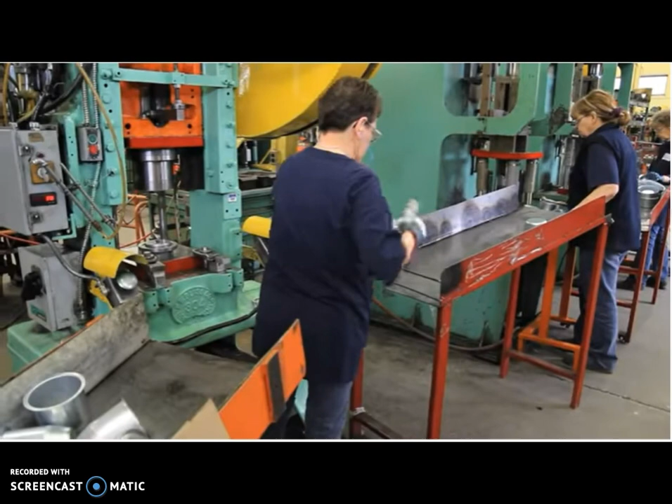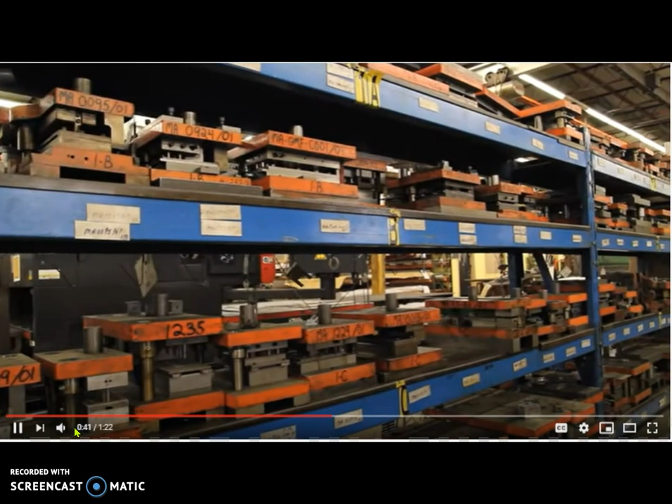Donc ici, c'est un poinçon et matrice progressif. La pièce est ici, la dernière découpe la pièce, mais à chacune des étapes, on perce un trou, on découpe une partie de la pièce, on la forme ici, elle est pliée, elle est embossée à ce niveau-là, puis finalement, elle sort.

Donc ça nous donne une idée du matriçage. Là, on a eu dans la vidéo un emboutissage profond, puis on a eu aussi dans la vidéo un poinçon et matrice progressif.

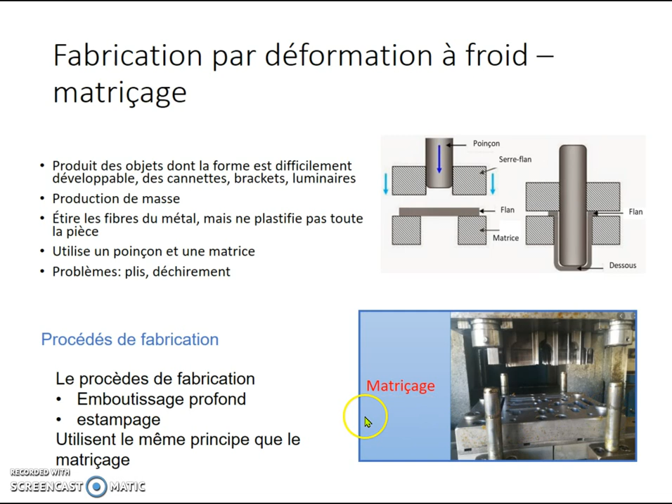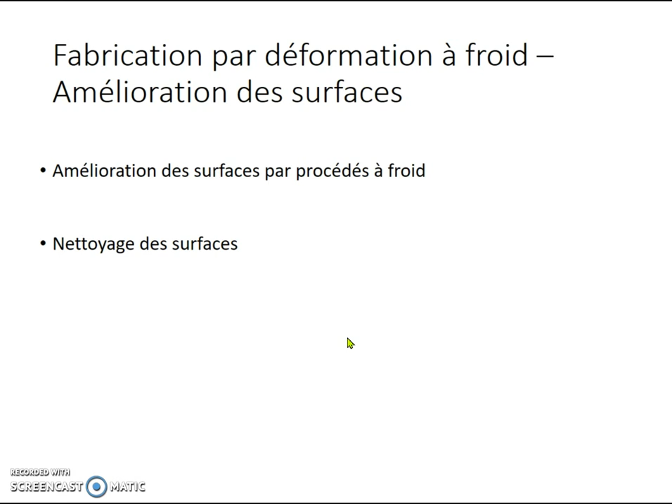Maintenant, on va traiter l'amélioration des surfaces pour à froid. Encore, c'est des procédés de nettoyage ou des procédés d'amélioration. Le premier procédé qu'on va regarder, c'est le martelage ou le shot peening.

Ce procédé-là, on envoie des billes sur la surface qui va créer une micro-compression de cette surface-là. On va regarder un peu comment que ça fonctionne.

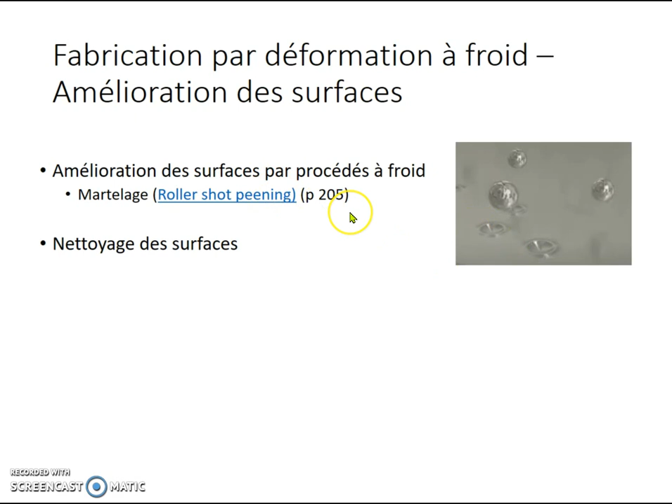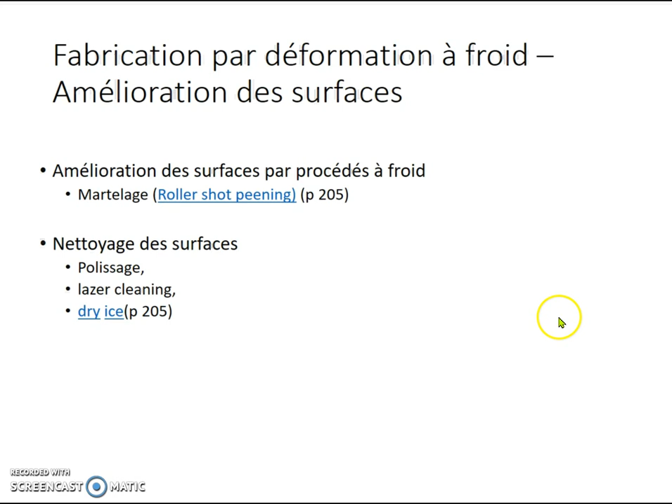Ensuite, on va regarder le polissage. Pour le nettoyage des surfaces, donc on peut polir les pièces. On peut aussi utiliser du laser pour nettoyer la surface. Et encore, on peut utiliser de la glace sèche pour un peu comme un sandblast, mais avec la glace sèche. Alors, regardons le premier, le roller shot peening.

Comment que ça fonctionne. On va regarder une petite vidéo qui traite de ça.

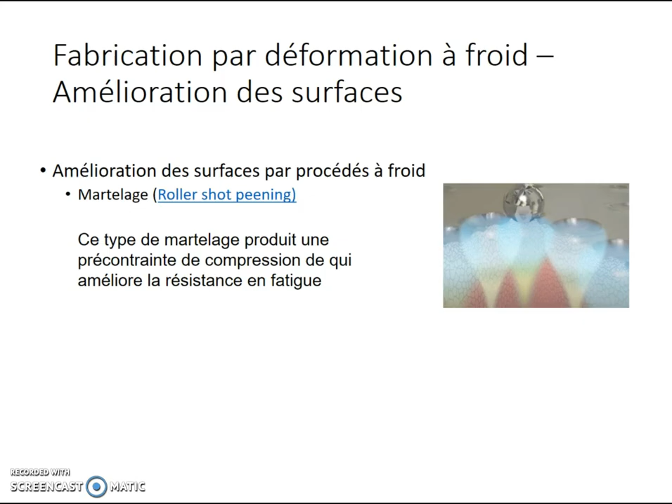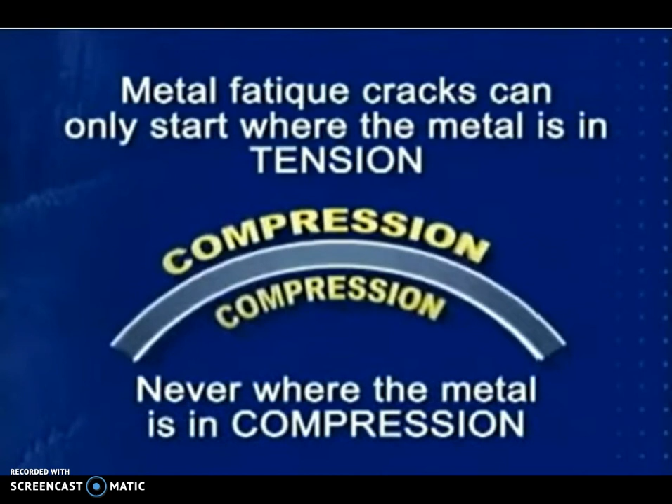When a metal bar is flexed a sufficient number of times, it will eventually start to crack in metal fatigue at the side where the metal is being stretched in tension. However, a crack will not occur on the opposite side, which is being pushed together in compression. So if we could somehow induce a compressive stress on both sides, the metal bar could theoretically be flexed much longer without cracks occurring on either side. The shot peening process, which impacts the surface with millions of tiny metallic or ceramic spheres, is a practical and cost-effective method to introduce a residual compressive stress on and beneath the surface. If a flexing load is applied to a shot-peened metal bar, the load must overcome the compressive stress from the shot peening process before a crack can start. This can translate to a significant increase in the service life of the part. To re-emphasize, metal fatigue cracks can only start when a metal surface is in tension, never where the surface is under compression. Metal Improvement Company has been a pioneer in...

Donc, on comprend un peu comment fonctionne le martelage. General Electric à Bromont qui fabrique des aubes d'ailes, des aubes de moteurs d'avion. Chacune des aubes a été martelée avant d'être montée dans un moteur, comme ça augmente la résistance à la fatigue de cette aube-là.

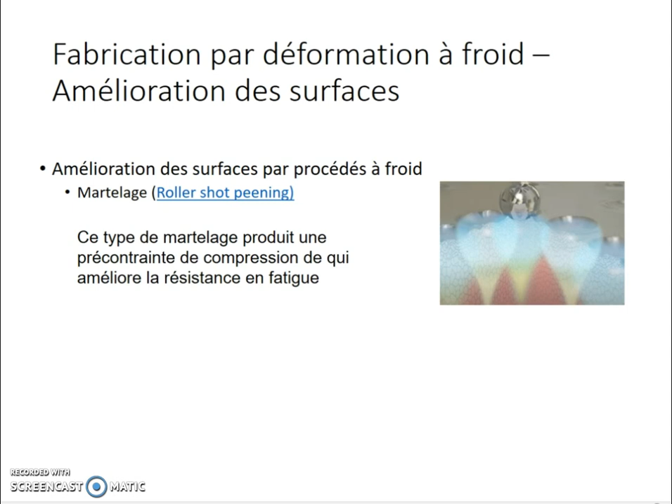Ok, maintenant on va regarder les procédés de polissage. Les petites vidéos, il n'y a pas grand-chose à dire sur ça, mais regardons un peu les vidéos pour chacune de ceux-là.

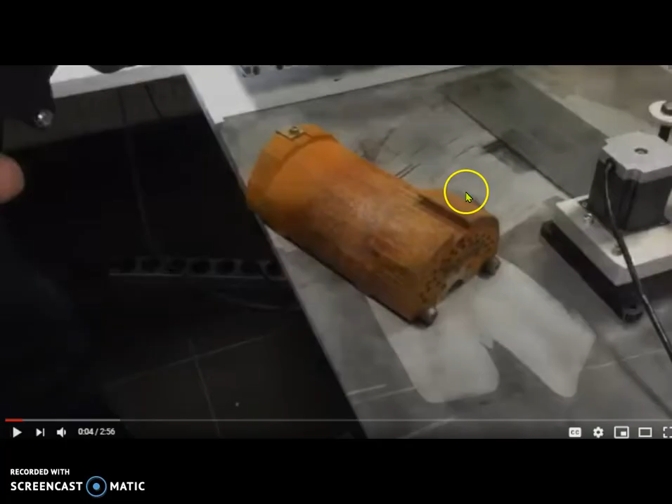Vous voyez le nettoyage au laser, qu'est-ce que ça produit? C'est quand même assez efficace, hein? Et surprenant.

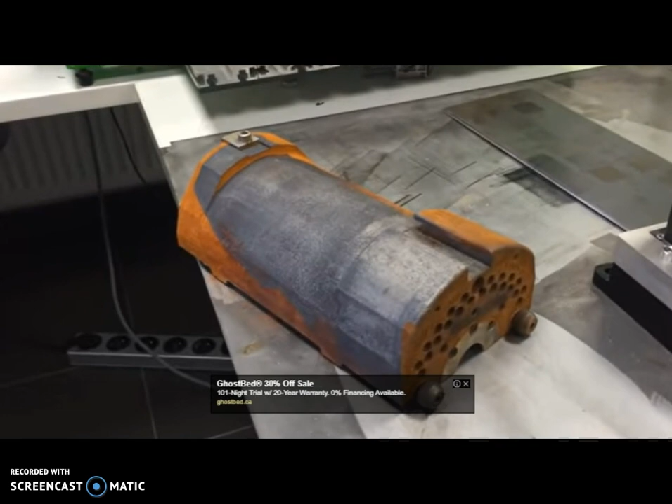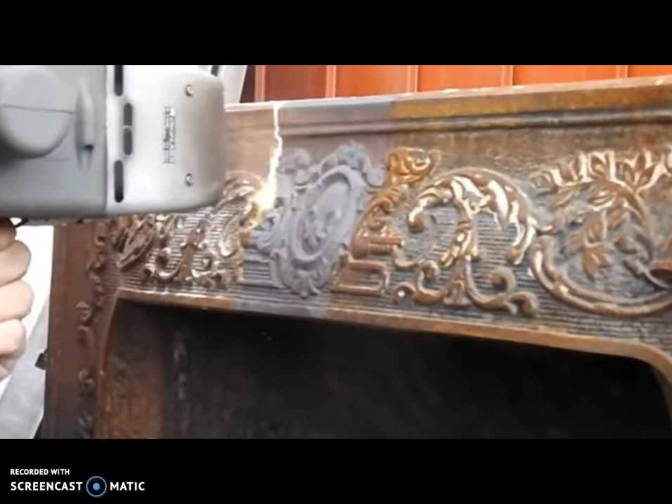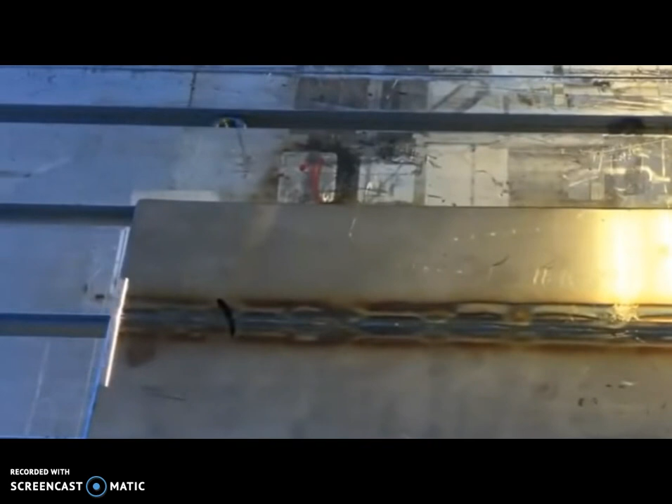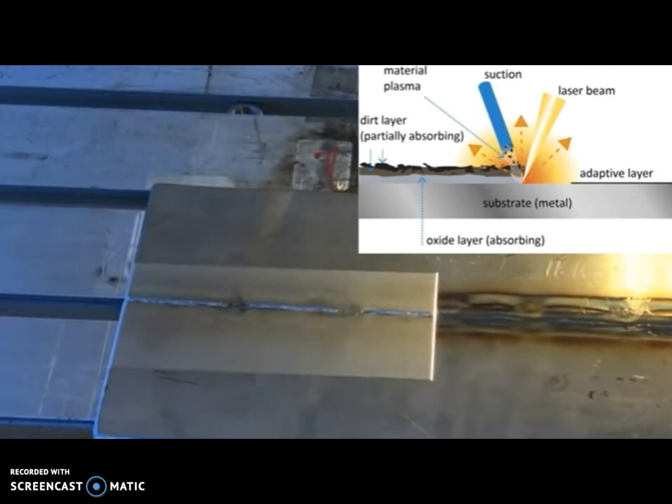I could not believe what I was seeing when I first came across this device on YouTube. A laser that cleanly removes rust and other surface contaminants without eating away the metal underneath. When aimed at a metal surface, the dirt layer and any oxides underneath will absorb the energy and evaporate. The metal underneath will not absorb the laser energy, leaving nothing but a clean surface ready for welding and painting. So how does it work? Well, the system uses short pulses of laser light at 1,000 watts, producing microplasma bursts along with thermal pressure and shock waves to sublimate the rust and separate it from the metal without damaging the piece.

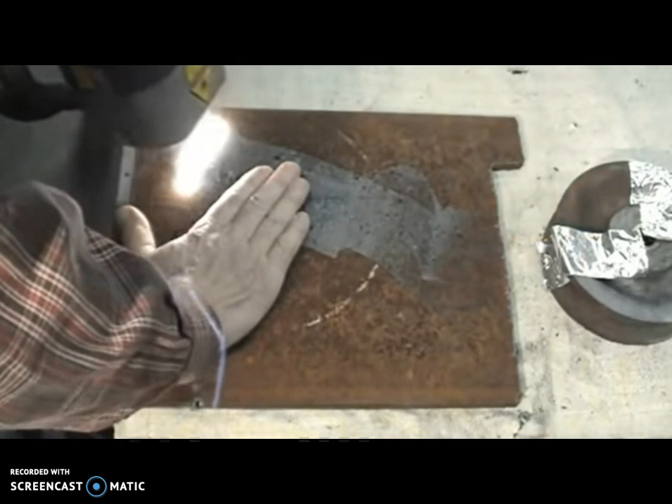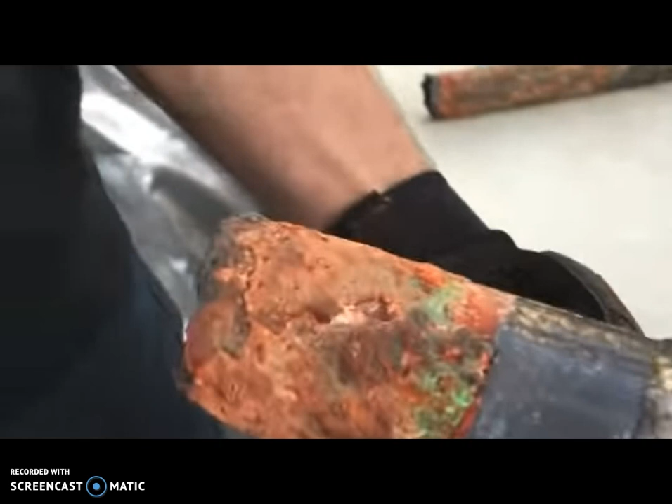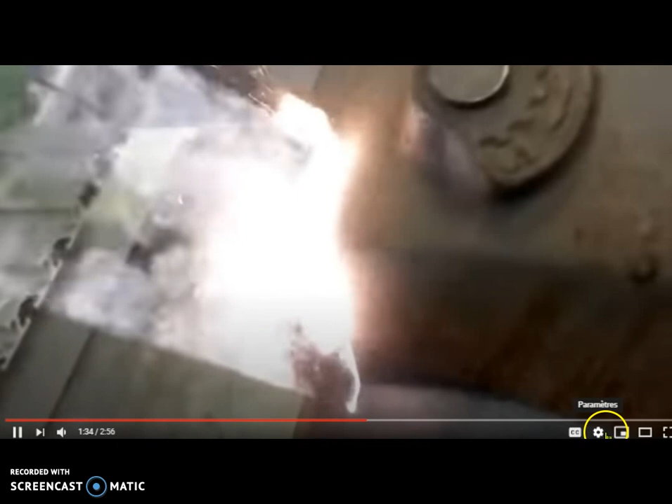Now, I know what you're thinking, as I wondered it myself, and the answer is no. This will not vaporize human flesh. Amazingly, aiming the laser at your finger doesn't even hurt at all. Material removal is halted when the laser is applied to a clean surface because it only sublimates rust. Sublimation is the act of changing the state of matter to a gas form, skipping the liquid phase. The device can be set for a certain depth to skim away surface rust, paint and filler, leaving a prepared surface for work. What would have normally taken someone hours to clean and prepare for welding or painting is now done in no time at all.

What makes this laser device even better is the fact that it has an onboard hoover system that immediately sucks up the vaporized rust, making the entire rust removal process clean and simple. Unfortunately, there is a rather large drawback: the cost. This state-of-the-art device is not sitting on some retail shelf somewhere for $100. The cheapest version on the market is a much smaller, less powerful 20-watt unit that starts at around $80,000, and the 1,000-watt unit will set you back nearly $500,000.

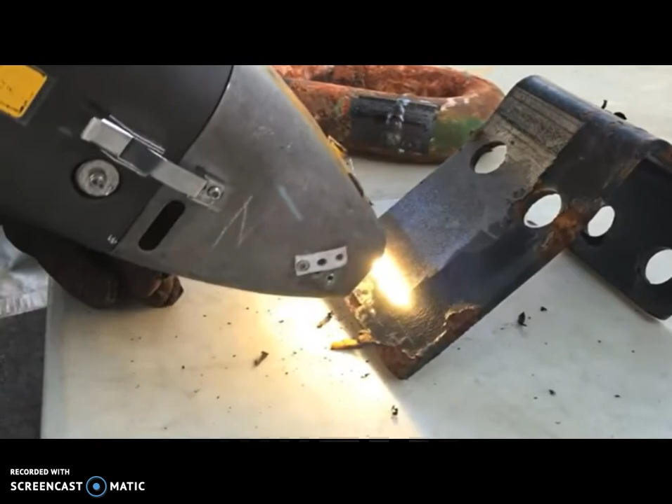Donc le laser, le nettoyage au laser. On va regarder maintenant le nettoyage à la glace sèche. Le polissage, je vais revenir, mon lien ne semble pas fonctionner.

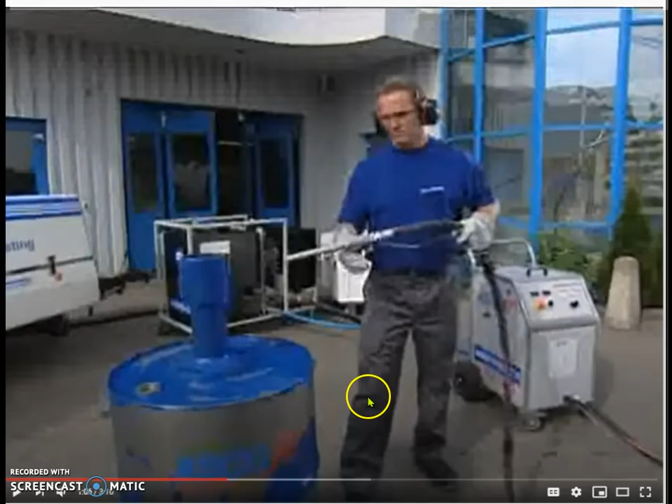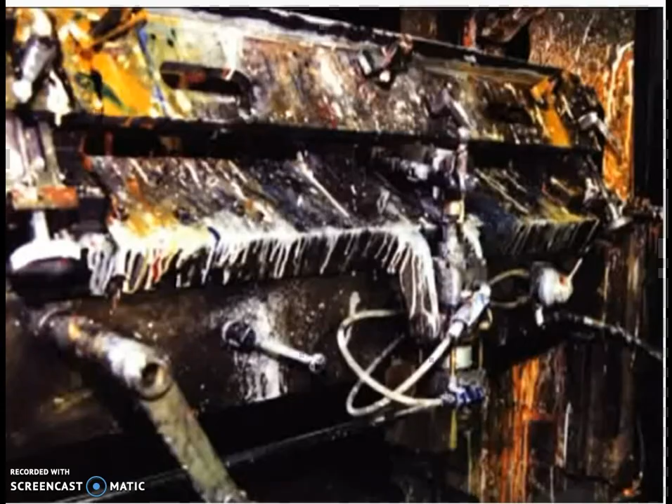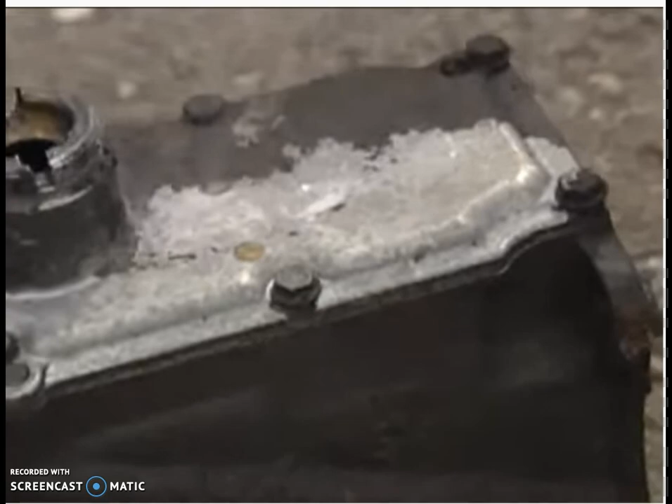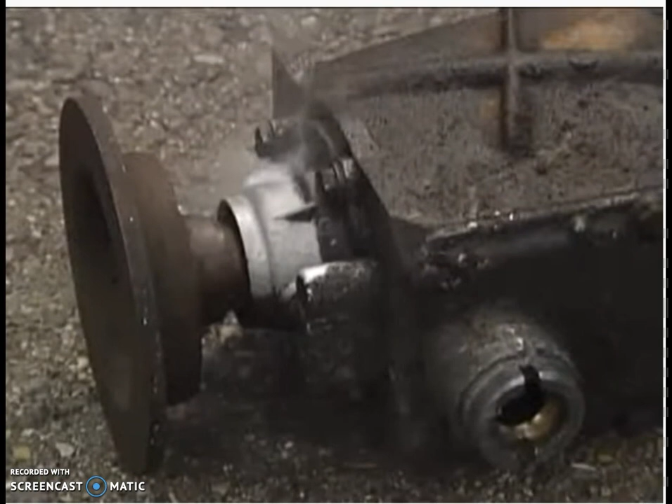As dry ice blasting leaves no residual blasting media behind, and no solvents or chemicals are needed, this cleaning method is environmentally friendly, and time and costs for disposal are saved. Dry ice blasting is virtually non-abrasive, and is therefore very popular in industries where expensive molds are used. The ASCOJET dry ice cleaning technology can be applied directly to machines or inbuilt molds without dismantling or removing them. Even hot molds, such as ingot molds and foundries, can be cleaned online.

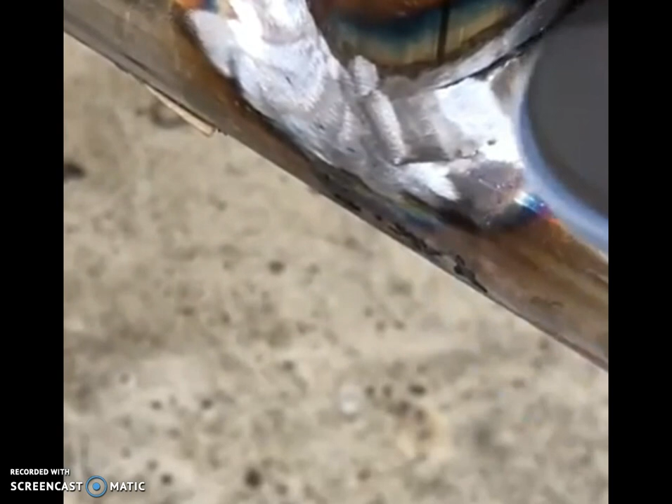Donc, ça y est, on vient de faire le tour assez rapidement des procédés de fabrication par déformation à froid. Je vous invite à lire aussi votre module, les notes de cours de votre module. Il y a de l'information supplémentaire dans ça qui est assez intéressante. Voilà.